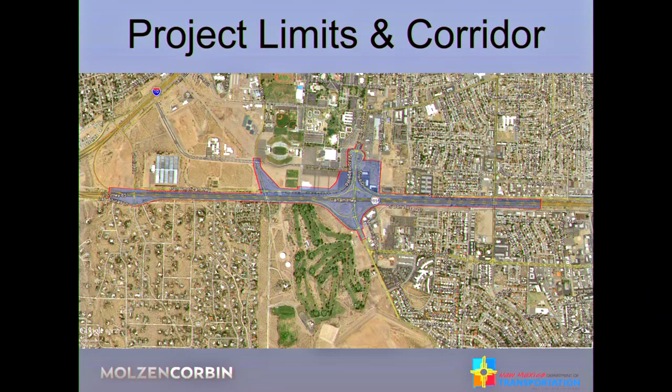Just quickly through our design team. As Dave mentioned, Molzen Corbin is the consultant for this project, and we've teamed with Bohannan Huston, Wood, Ecosphere, Cobb Fendley, and Eco Resources Management. This project is for the I-25 University interchange right here in Las Cruces. We actually studied more than just the interchange itself. We looked all the way back to the Lohman interchange and as far to the south as the I-10, I-25 interchange, and also from Telshor to Locust. But our study and our actual project area is focused right at the interchange itself.

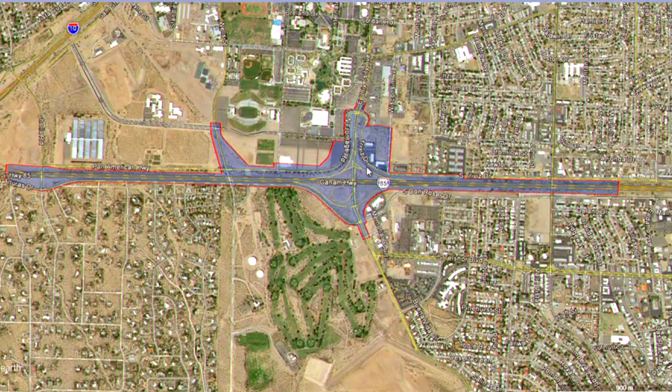A little background on the interchange. I-25 was originally constructed in the 1960s. The I-25 University interchange was constructed in 1966, and then it was rehabbed in 1988. And then again, many of you probably remember the 2012 rehabs that put in the loop ramp and extended some acceleration lanes. And just recently, the third lane was added between Lohman and University on I-25 as well.

Everybody that lives in Las Cruces and accesses this University interchange, especially when school's in session or there's a special event, realizes that the peak hour congestion, especially on I-25 southbound, can be problematic. That's one of the things we're trying to improve with this project. Pedestrian and multimodal access is also in great need of improvement. There are very few sidewalks, and if there are sidewalks, they are often not compliant with current ADA standards. Along with that peak hour congestion, there's the southbound off-ramp geometry, and one of the major concerns is safety associated with all of these things. So with this project, these are the things we're going to try to address.

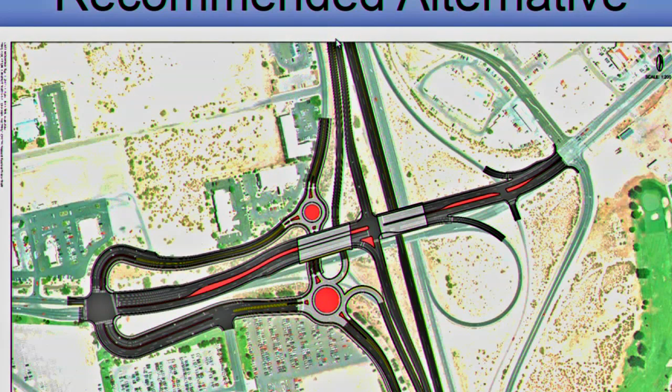Our improvements are mainly focused on the southbound off-ramp and how that can be improved. So currently, the southbound off-ramp, you get off and you go up to University Avenue, and that's your only choice. Well, now you will have two choices. You can go up to University Avenue like you do now to a signalized intersection, or you can stay in the right lane at this ramp and go down and underneath University Avenue, very similar to how you go under Lohman on Triviz, just further to the north. And so there's a new bridge that'll be constructed here.

With this new bridge, we also took the opportunity to have Triviz go underneath University Avenue. So Triviz goes into this smaller roundabout on the north side of University Avenue. You can still continue to go on Triviz like you do now, or you can go under University Avenue.

One of the things that we did to ease construction, here's the existing University Avenue, and we've pushed University Avenue to the north. And that does a couple of things. It allows a lot of this bridge to be constructed offline so that traffic isn't disturbed while that bridge is being constructed. And then it also will decrease the time needed for the construction as the contractor has a little bit more room to work.

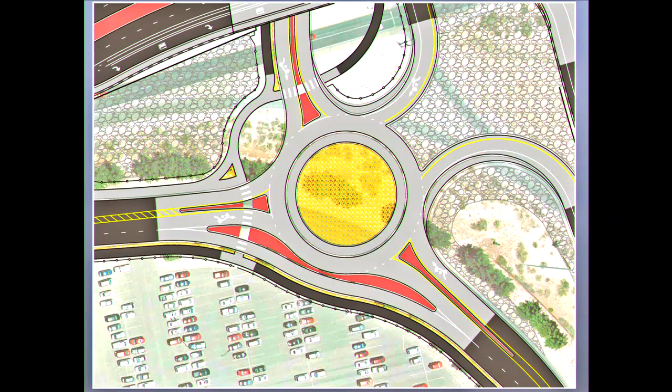Just to give you a blow-up here, this is the southern roundabout. So where my mouse is here, this is the off-ramp. So if you're coming on I-25 and you want to get off, you'll come here, you'll yield to somebody that's in the roundabout, and then based off of our traffic modeling, we found that most people are actually going to go down Triviz and access NMSU, which is kind of to be expected.

And so on that route, we made sure that there's no pedestrian conflicts here. So you can see pedestrians cross here, but there's no pedestrian conflicts along this. So somebody can access from I-25, go around the roundabout, and directly on to Triviz Drive. One of the things that we've done with this roundabout to keep it simple is it's a single lane roundabout.

You can see that if you're on Triviz and you're headed into the parking lots, there are two lanes coming in, but you can see that this is a raised median that separates the roundabout. So there's no way that you can switch lanes in a roundabout, and it eliminates a lot of that confusion.

We've also accommodated large trucks, being that this is an interchange off of the interstate. So you can see this inside piece here is a concrete apron where trucks can actually use that if they need to for their wheels to bump on. We've done similar things here as well. We wanted to control the speeds of passenger vehicles, so we squeezed things down, but we've also accommodated those larger trucks trying to make those movements.

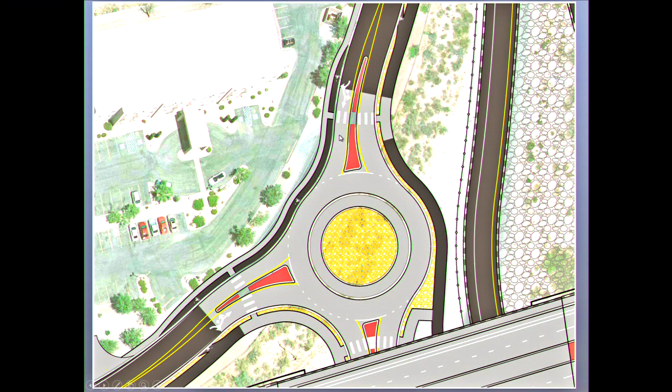So you can see that the roundabout is concrete, the bicycle lane is asphalt, and then the sidewalk would be concrete again. So not only does it have a vertical difference between the 3 different levels, but it also has the color difference so that it's easy for people to see. Bicyclists could also occupy the entire lane if they wanted to use this roundabout.

One of the goals that we set out on this project was to be sustainable. We talk about sustainability all the time in the engineering world and especially the architectural world, and you probably have all heard of LEED, so a building is LEED certified. Well, that doesn't really apply to horizontal construction. So what we did with this project is we incorporated Envision, which is started by ACEC, ASCE, the Institute for Sustainable Infrastructure, and APWA. And it is basically a LEED for horizontal infrastructure.

The DOT does a really good job of being sustainable. And with our project, we have a goal of a gold rating. I think platinum is the highest rating that's available, but gold is something that was achievable by making sure that we make the most of our resources here and recycle things as much as possible.

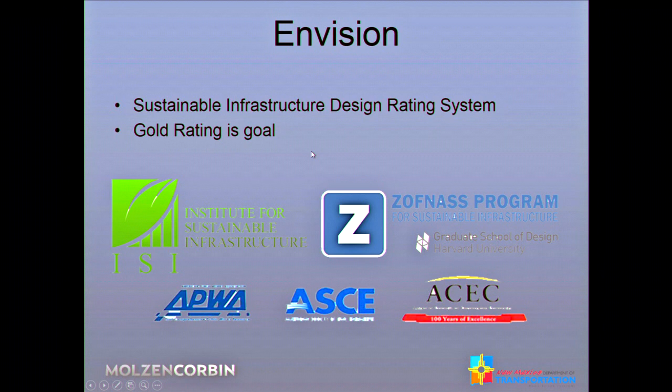One of the biggest concerns, I think, of everybody here is construction phasing and how will you get through this thing during construction. So through the design, we've taken a lot of that into consideration. And so with the exception of a very short phase, there will be 2 lanes of traffic on I-25 in each direction at all times. We do have an initial phase where we have to build a little bit of an inside shoulder, but that's a short duration, and then we'll have a paving operation at the end, a 1-day operation where they shift traffic around and pave through there.

Traffic on University will also have 2 lanes in each direction at all times. We will have night closures to construct or remove medians and things like that, but during peak hours, we want 2 lanes of traffic in each direction. Because we're putting in a new bridge and demoing that existing bridge, we also have to have closures of I-25. You can't put a new bridge beam across I-25 with traffic underneath it. So we will close I-25, detour traffic up the ramps, and then back down onto the interstate. We also have a detour on Triviz so that that piece of Triviz can get constructed quicker.

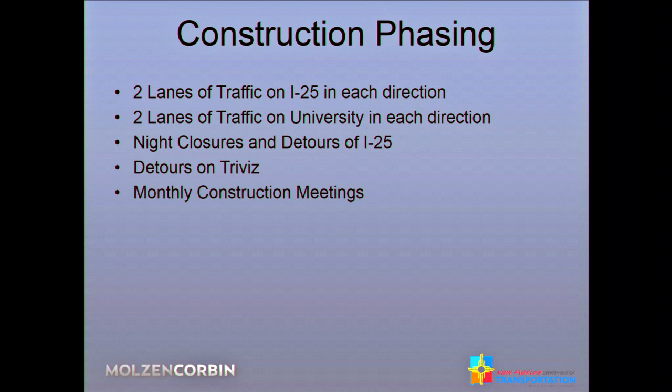And then one of the things that we will have is monthly construction meetings. As a design consultant, we come up with an idea of how we think it should be built, but the contractors who do this all the time usually have better ideas. So they'll keep us informed through their monthly construction meetings on where traffic actually will be, how things will work, and the things that they'll be working on. And so all of those will keep you informed throughout the entire construction. Here's our schedule. As I mentioned before, our final design is due in August.

We'll bid in October. Construction begins probably early 2019, and right now we're looking at about an 18-month construction time. One of the things that we've incorporated with this project, as this is kind of the gateway into Las Cruces and into NMSU, is we wanted to make it look good. We didn't want it just to be a gray concrete bridge. So we've put a lot of work into aesthetics.

And through that, we had an art selection committee that was made up of NMDOT representation, local artists, NMSU, and City of Las Cruces representation. We had 14 artists that applied. Those artists were then screened down to the top 6 finalists, and then we screened them down from 6 to 2. And with us tonight is Colette Marie, who is our selected artist, and her art's on display here. She actually has a pre-recorded piece that you'll see in a moment.

And so with all these bridges and walls, they're all going to have some art on them as well. As far as aesthetics and landscaping, the City of Las Cruces has committed money to landscaping this project, and NMSU will follow this project with landscaping of their own. So that's a big step for Las Cruces, that we're going to have art, landscaping, and a complete interchange that looks good for the community and something that we can all be proud of. Before we get to questions, I'm going to play a couple of these videos here.

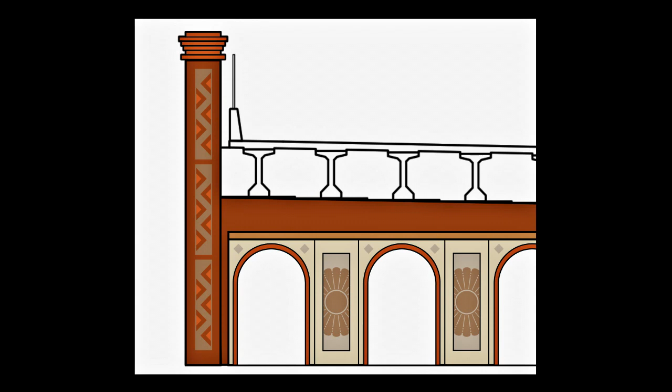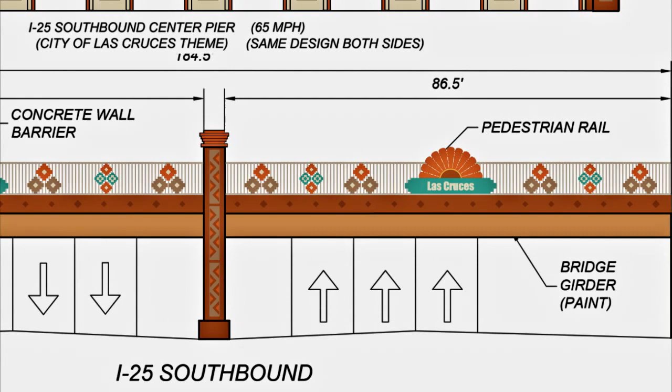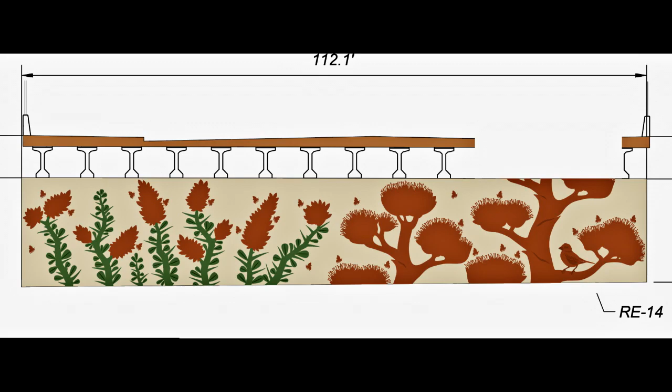Thank you. Tell us a little bit about the themes in the graphics that you designed for the I-25-University project. Well, the prospectus had some guidelines from the committee that called for particular themes on certain areas of the bridge design. On the I-25 side, they wanted a Las Cruces theme, and over on the NMSU side, an NMSU theme, with some elements of Southwest design mixed into all of that. But one of the main concepts I was working with was an earth and seed pattern that I developed, symbolic of academic growth and literally planting seeds in the ground to cultivate crops and plants. So you have wavy fields of furrowed ground with the seeds getting planted in the background, and then larger close-up looks at some of the plants and animals.

So we can talk a little bit about those. But I notice very obviously you didn't pick a roadrunner. We see a lot of roadrunners in all sorts of murals and designs, particularly in our area, but you picked something else. What did you pick instead of the roadrunner? Instead of the Greater Roadrunner, I selected the New Mexico whiptail lizard. The New Mexico whiptail lizard, and why particularly did you pick that? Well, you see a lot of representation of the roadrunner everywhere.

It's a really great bird. I can't deny that. But the whiptail lizard doesn't really get in the limelight very often, so I decided to feature her, especially since she is the New Mexico state reptile.

Right, right. I didn't know that New Mexico had a state reptile. Of course, we know about the roadrunner as the state bird, and the yucca is the state flower. State cookie is the bizcochito. Yeah. And of course, the state question, red or green. Right, and we'll talk about chili a little bit later.

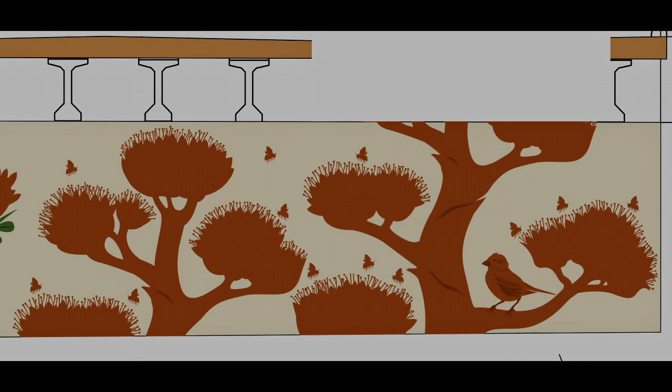Yes, I wanted to include some desert plants that we have here in Las Cruces and in the Southwest. The ocotillo being one, which I feel is underappreciated. It's really beautiful. It's not a cactus, people think it is a cactus, but it's actually a bush, and the agave is a bush as well. So I featured the blooms of both the agave and the ocotillo.

And you'll see on the branches of the agave bloom that there's a song sparrow there, which is actually a tribute to my grandmother, because early on she saw my passion for creating art, and so she was a key role in fostering that passion. And she was a lover of birds. That's great. We do have some wonderful birds around this area.

And that century plant, or the agave plant, those blooms, when the sprout comes up and it has those blooms, it's quite spectacular. It's beautiful. It really is. You can see many images on Instagram and Facebook when the blooms come out, and especially with the ocotillos too, you see pictures everywhere.

Right. And of course, like you say, people think it's a cactus, and most of the year it's kind of like just these spiny sticks sticking up out of the ground. But then, when the rains come, it gets these leaves and these really beautiful blooms. I think I read somewhere it's sometimes referred to as the candle of the desert, because it lights up like a flame, the red color, and it's so bright. It's really beautiful.

All right. So there are some other images that you've come up with. Do you want to talk about some of those? Well, on the I-25 side, because we experience so much sun with our weather here, I wanted to have something representative of that. So I created what I'm calling a sun disk on the side of the gateways, and on the pedestrian railing I used a sunburst. Those are drawn from popular Southwest geometric shapes and images that you'll see around these parts.

Right. We could talk a little bit about some of the images that you have. Well, the bridge is broken up into different sections. There's the I-25 side, and then the gateway heading into the university. On the NMSU side, since NMSU is an agricultural university and started out that way, I wanted to include crops. So I selected some major crops around this area: the pecan, the cotton, and of course chili, since we love chili.

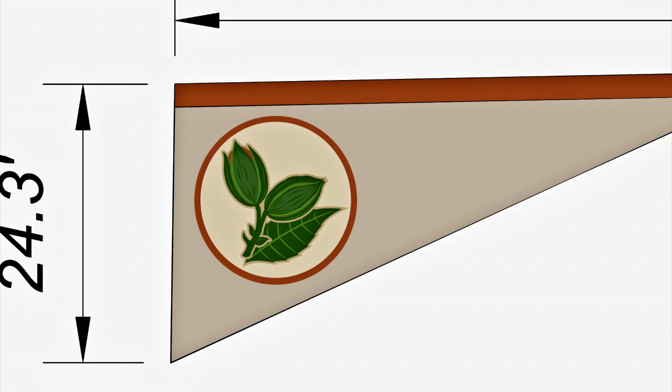So it's my understanding that something about pecan trees in the NMSU master plan inspired you to include pecans in your design? Yes, I'd like to read something from the master plan which helped me decide. To reinforce campus entry and identity, the planting of pecan trees is proposed to continue along all major campus entry drives. These campus entries provide opportunities for identity marking, which will help NMSU achieve greater visibility in the community and provide clear signals that tell visitors where to enter campus.

Oh, okay. And I wanted to have the pecans and the pecan leaf, as you see in that design, the same as they're using on campus. They have sort of an identity mark and a signal that's saying, hey, you're coming onto campus. Coming into NMSU, right.

So let's see, well, we talked about chili and cotton, of course, a very important crop here, and onions. I have a relation through marriage that grows a lot of onions and these other things, and I worked a summer in the onion sheds myself, and I know that a lot of work and a lot of onions are produced in this area. And you can't miss the smell when they're blooming. No, you can't, and I had a hard time getting it off me after I worked in the onion sheds for quite some time.

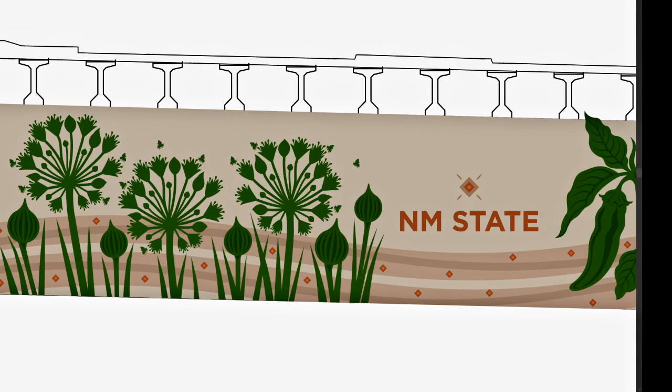So, anything else that we'd like to cover that we might have missed somewhere in our discussion about any of your designs or your concepts? Well, I just wanted to say that I wanted to implement larger-than-life imagery to create an immersive art experience for the viewer. So you have these exceptionally giant crops, chili and cotton, as you're driving through them, as opposed to seeing just small little plants on the side of the road.

And I also wanted to bring rural elements to an urban landscape. And so people passing through can say, hey, I'm getting a little bit of an idea of the culture and the desert life plants that are here in New Mexico and in Las Cruces in particular.

Right. Kind of talk about the process that you went through to be selected to do the artwork. I signed up for a newsletter on a website called Cafe, and so they send out these calls for artists. And I actually missed the call, and a friend saw it and sent it to me at the last minute. It was maybe 4 days before the call was closing.

And so I literally spent like 4 days and nights just working and trying to get my submission ready. It was a resume, and I had to do an online portfolio and an annotated list of images, and so I was basically scrambling to get everything together at the last minute and submit it by, I think it was a Monday. So I made it just in the nick of time. Another fortunate thing that happened.

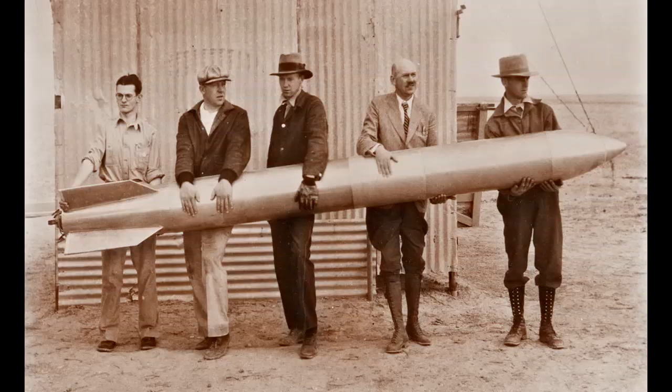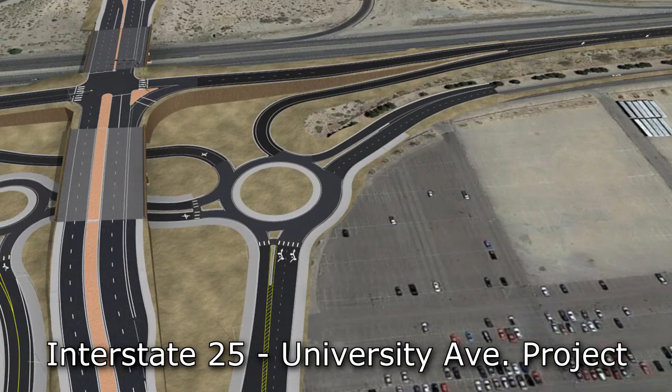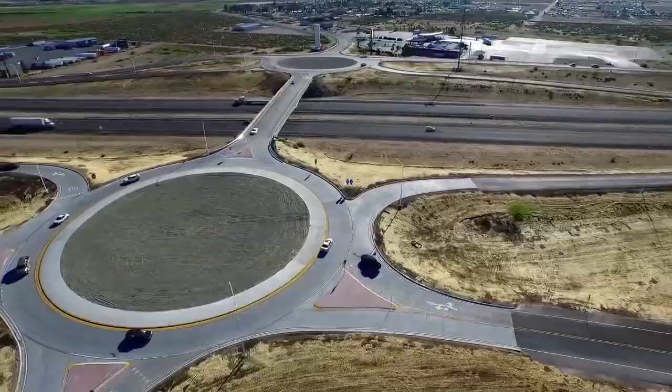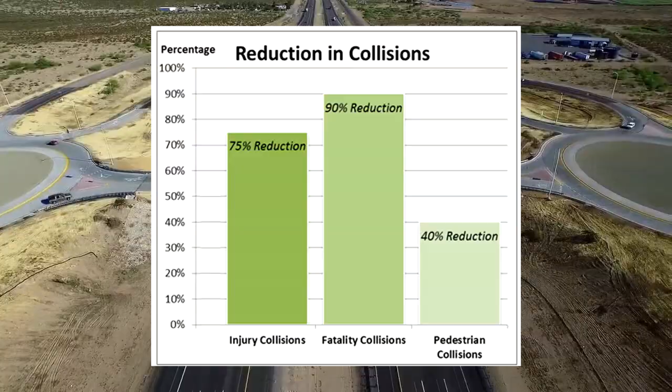New Mexicans have a reputation for being pioneers in engineering. Now, here in Las Cruces, we have the opportunity to be an innovator in traffic safety. The innovation is the simple-to-use, one-lane roundabout. The U.S. Department of Transportation reported a 75% drop in injuries at intersections across the United States that converted to single-lane roundabouts. And a Washington State traffic study concluded that this type of roundabout has reduced crashes by 50% and traffic fatalities by a whopping 90%.

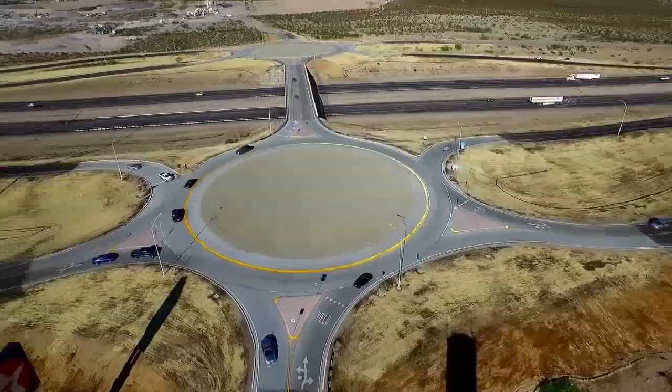When safety is considered, it is the most ideal type of intersection. This roundabout will be easier to use than the one at the north end of Main Street in downtown Las Cruces, because any confusion caused by the changing of lanes in the roundabout has been eliminated. This lends to a more intuitive way of using it.

Before entering, yield to the cars in the roundabout and pedestrians. After entering, you have the right-of-way, so do not stop or back up. If you miss your exit, simply go around again to get to your exit. Of course, as always, yield to pedestrians while entering and leaving the roundabout.

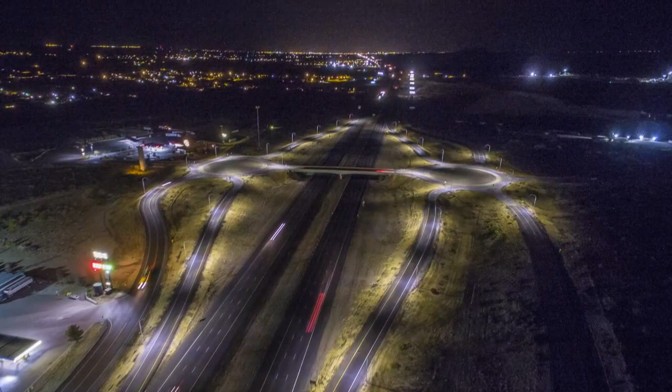Even though it appears that the reduced speed is hindering traffic flow, studies have shown that because no time is wasted waiting for traffic signals and people making left turns, a roundabout has a better hourly flow than a conventional intersection of the same size. This is a great example of slow and steady wins the race.

To those who think roundabouts are too different, this is actually a safety feature because it piques the attention of drivers entering them, and this eliminates the second cause of fatalities. Let's see how the two roundabouts planned for the Interstate 25-University Avenue upgrade will work. Drivers on Triviz from Missouri will approach the north roundabout and have two options. Take the first exit and access University Avenue.

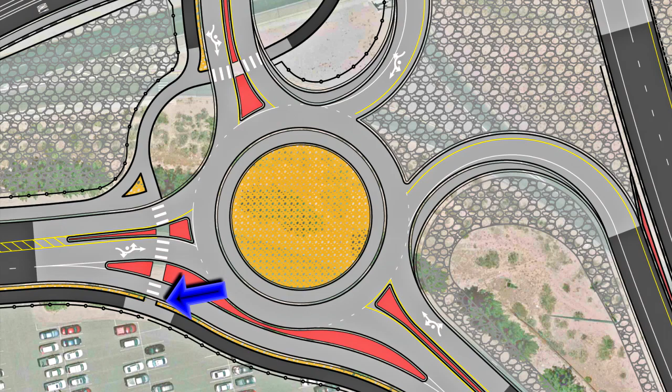Or take the second exit and go under University Avenue to access the NMSU campus. Most drivers exiting Interstate 25 to the southern roundabout will be headed to NMSU campus and parking. They will yield to existing traffic, then take the third exit to access Triviz towards Stewart and Wells Street. To further increase safety and flow, this route has been designed so that drivers will not encounter any pedestrian crossings. Drivers coming from University Avenue can bypass the roundabout by staying on the right lane and yielding to pedestrians.

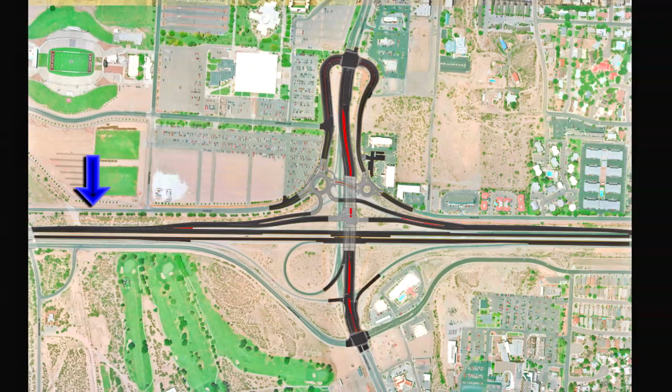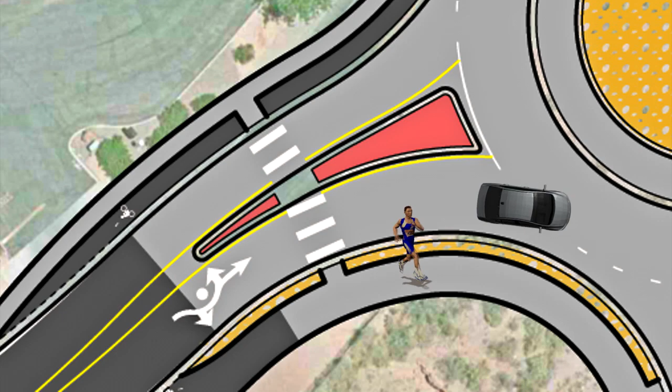The needs of bicyclists have been considered in designing these roundabouts, and dedicated lanes will be built in both directions. For the north roundabout, bicyclists have three options. Option 1, use the dedicated bike lane and then occupy the entire lane when entering and leaving the roundabout. Option 2, use the dedicated bike lane, then use the bike ramp to access the multi-use trail. Use the crosswalks as a pedestrian would, then use the ramp to access the dedicated bike lane north of the roundabout. Option 3, use the multi-use path and cross the roadways as pedestrians would.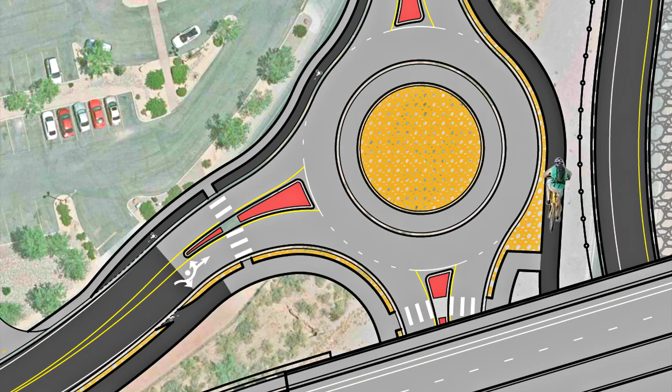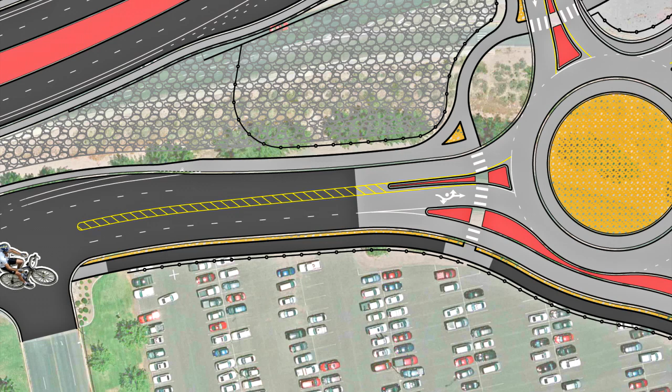For bicyclists traveling north on Triviz from Missouri headed to University Avenue, a separated bike lane is available. Bicyclists on Triviz headed south from University Avenue are offered two options. Option 1, use the bike lane to Arrowhead Drive, then access the multi-use trail. Use crosswalks as a pedestrian. Option 2, use the bike lane, but then occupy the left lane to enter the roundabout.

This roundabout is not a product of random chance, but of careful, intelligent design by some of the best engineers in New Mexico and you. This has resulted in features for pedestrians, bicyclists, drivers, and even truckers, with the addition of a truck apron around the center that is designed to handle the weight of semi-trucks. We thank you for your continued public participation to help build the safest roads possible.

Well, this is the first part of the program, and it's been about hearing from the experts. But now we need to hear from you. So the live Q&A is about to begin. So if you're not with us here at the City Hall, please call in your questions or contact us by email, Twitter, or Facebook. Anyone in the house have a question? If you could come to the podium, right? Just right down here. Yes, sir.

Jack Valencia. I'm a resident in the impacted area, which is south of University Avenue in the Triviz, Missouri corridor. I'm a former city councilman from 1985 through 2001 here, so I'm familiar with some of the improvements over time which we've had. My question lies in the traffic that is getting off the university and turning and heading west on University Avenue at the intersection of what is presently Triviz and University.

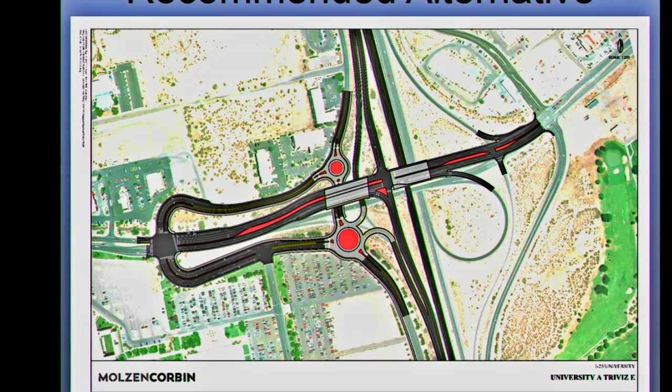So with the new, you're talking about this intersection here, correct? Is that the present, Triviz and University Avenue? Yes. So that is essentially going to remain the same. One of the improvements that we're doing here, you still have the dual left turn lanes into the campus. If you're on Triviz, you have a dedicated left, a through into campus, and we've added a dedicated right turn lane. And then also on University Avenue, we've added a dedicated right lane to go back on Triviz.

That is the question that I have. Is there going to be additional capacity to undertake the stacking to turn? Correct, yes. We do have that dedicated right turn lane, which people now kind of use the bike lane and shoulder to make that movement. There is also the ability that if you wanted to go underneath University Avenue and take the first exit on the roundabout, you could go back north on Triviz as well. Okay, thank you.

My name is George Pearson. I'm not sure if I saw what the speed limits are through the roundabouts. If you can speak with the speed limits that you're planning, and if you anticipate that that will be the actual speed of the drivers. So the roundabouts have a posted speed of 15 miles an hour. We have design speeds of the curves approaching the roundabouts to reduce the speed of the driver, especially on the interstate one, from 65 miles an hour down to 15 miles an hour.

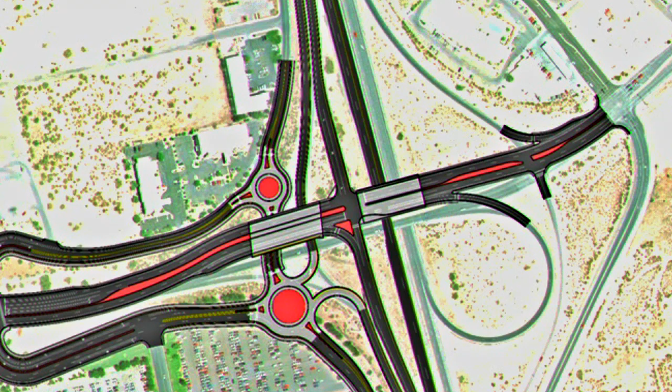We have a question from Daniel Aguilera on Facebook. Who paid for the third lane between Lohman and University? The third lane between Lohman and University was an NMDOT project, funded by state funds and through FHWA. We also have one question from Mark online asking what will happen during graduation, football games and basketball games. During construction, we'll have the contractor coordinate with NMSU and the local police to make sure that we accommodate them as best as possible.

For special event traffic, we've looked at some options once the project is complete. When a special event occurs now, traffic on I-25 southbound backs up significantly as people try to turn left into Triviz Avenue. With this project, because we are providing direct access into NMSU, we anticipate that the police departments may close this exit of the north roundabout so that there's no traffic here.

And they may also close the left lane of Triviz Drive on the south side of University Avenue so that all the traffic would use the bypass lane. All of the traffic off the interstate would have a free movement around the roundabout and directly into campus. So with special events, we anticipate that if necessary, the police will make modifications and close some roadways to accommodate that higher volume of traffic.

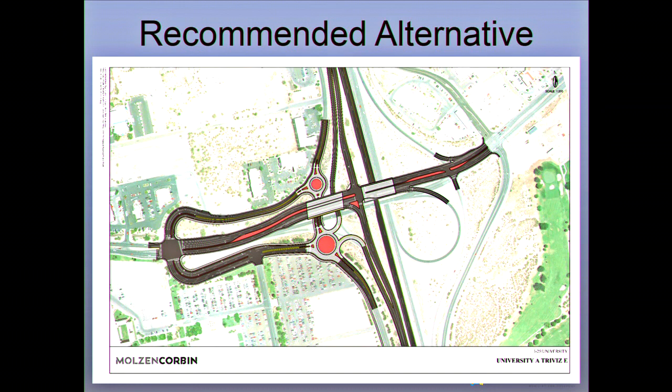Well, this question comes from Sarah via email. What input has NMSU given on this project, and how will it affect NMSU students? Well, this project, we've actually affected NMSU students in ways that probably most people wouldn't think of. We've partnered with the NMSU Civil Engineering Department, and they've actually used this project as their senior design project for 2 classes, 2 semesters. And so they've got to learn some on-the-ground, hands-on experience with something that's right in their back door. And I think NMSU is going to continue that through construction.

Short term, through the construction, people probably need to plan ahead a little bit. Like I said, we're going to keep 2 lanes of traffic open in each direction, but with any construction that goes on, backups often occur. So plan ahead. I know those 8:30 classes or 7:30 classes are rough, but maybe leave a little early.

And then once the construction is done, we anticipate that it'll really help the flow into campus, particularly with the southbound off-ramp directly into NMSU and directly out of NMSU. Not only will it alleviate the backup that occurs on I-25 southbound, but it will also free up some capacity on I-25 or on University Avenue as well.

So this is from an NMSU student, I believe. Ellen asked this question online. I can't avoid this interchange, so I guess it could be somebody besides a student. How do you plan to notify the public what is happening during construction?

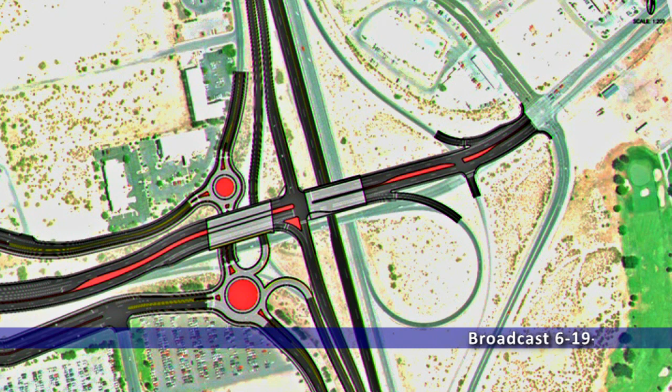There were a couple of reasons that we took out the left turn lane. The biggest reason was that by having it as a dedicated right turn lane, a free-flowing movement, you didn't have this conflict at the signal, and it also sped up traffic on University Avenue because there wasn't that left turn phase. And also, because there's a left turn and a right turn, it kind of causes driver confusion now. You're not really sure which lane you're supposed to be in, and so you see people kind of guessing at the light, is it going to be red or green?

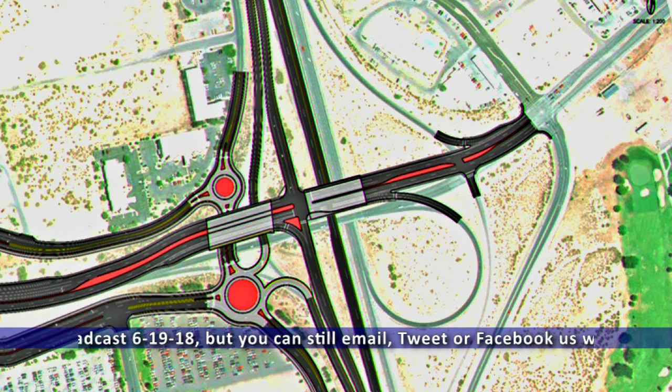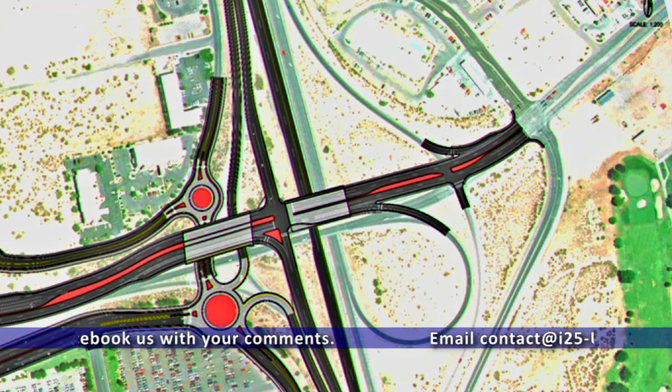And then they jump over. If it's green, they jump to the left lane and turn left because that's a little bit faster, but if it's not, then they'll stay in the right lane and go around. And so we're trying to eliminate some of those safety issues. But the biggest thing that we did was improve the flow of the interstate here.

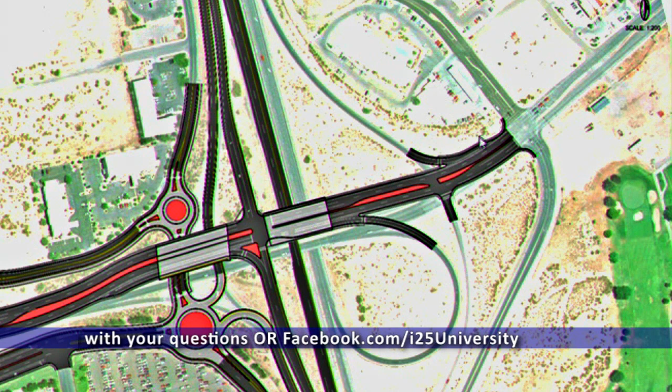One of the problems that you have with this left turn lane is that this is Don Roser and Las Alturas, and here's the interstate on and off ramps. This is a really short distance, and so the signal cycle had to be really short in order for that left turn lane to be accommodated. Because we don't have that left turn lane, we can increase this signal time and decrease the backups that are occurring within this segment particularly.

And then as far as improving the traffic signals along University Avenue, we are interconnecting them throughout the project and also up to the Telshor intersection as well, so that all of those signals will communicate with each other, and hopefully we can make it where, like if you were to drive Amador or Lohman, you get lots of green time as you're traveling on University.

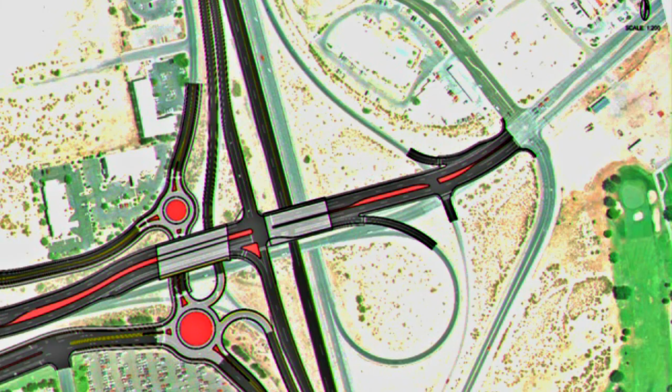All right, we're going to give Wyatt a little breather here. And here's a question for Colette. And I think we actually talked about this in the video. But the question is, are you native to New Mexico? And what inspired you for the design of the bridge project? Yes, I am native. I was born here a long time ago. I won't give the date. And what was the second part, the inspiration? Yeah, just what was your inspiration?

Well, I feel like you can't really go wrong with plants and animals. They're pretty easy to please people with those designs. And that's pretty much what I've been doing the last 5 years, focusing on native New Mexican plants and animals. So I thought it was pretty appropriate for this design project.

Well, and you had some parameters, too, that you had to go with the master plan within NMSU as far as the trees and agriculture and things like that. That's true, yes. And there were some things in the prospectus that we had to consider. They called for certain themes, and so I just followed the guidelines for that. Thank you.

All right, this is from Paul Hamilton from Facebook. Will construction be done throughout the night every day or only on days when the highway needs to be shut down? That's a hard question to answer at this point. I wouldn't expect that construction will be done at night every night. There'll be phases where the contractor's out there for probably weeks on end at night, but then there'll be times where there's probably not any night work going on. It'll just depend on the phase of construction that they're in.